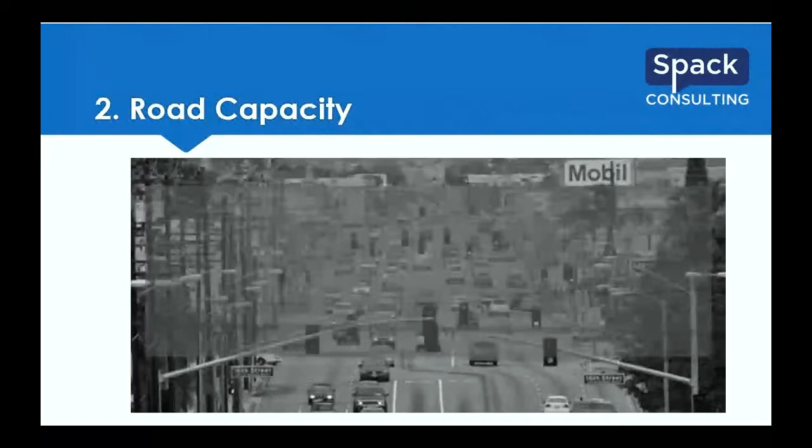All right, moving on. We're going to go to our second topic, road capacity. Yeah, and these are planning level capacity numbers based on the latest Highway Capacity Manual, the 6th edition. And there's a lot of assumptions baked into the tables there. So again, these are rules of thumb. And we pick the daily capacity at kind of the level of service D/E boundary. And there is a range there of vehicles, but we'll just go through the first ones.

And the first bullet point, and this is a controversial one because this is the one number that's not out of the Highway Capacity Manual, is the 2-lane local road. Our next bullet point is going to show a 2-lane road has a capacity of more than 10,000 vehicles per day. But of course, you don't want to tell somebody in their subdivision out in the suburbs that, hey, your road can handle 10,000 cars a day. They will look at you like you're insane.

And early in my career, I read about research coming out of the University of California, Berkeley. I believe the research was done in the 70s, that when a local street had more than 1,000 cars per day, people didn't know as many of their neighbors, and they were able to subjectively measure that quality of life degraded. So this research put the line at 1,000 vehicles per day on just a local 2-lane road for livability purposes, kind of the ADT threshold. So that's what I've used throughout my career.

If any of you have other resources or can help me find that research, because I've never been able to. I've gone back to my University of Minnesota library. I've emailed people at Berkeley. I've done all kinds of things. I think it was Professor Duany, something related to those new urbanist folks that I got on this thread, but I can't find that resource, but I still use it. Luckily, we haven't been challenged too much on it.

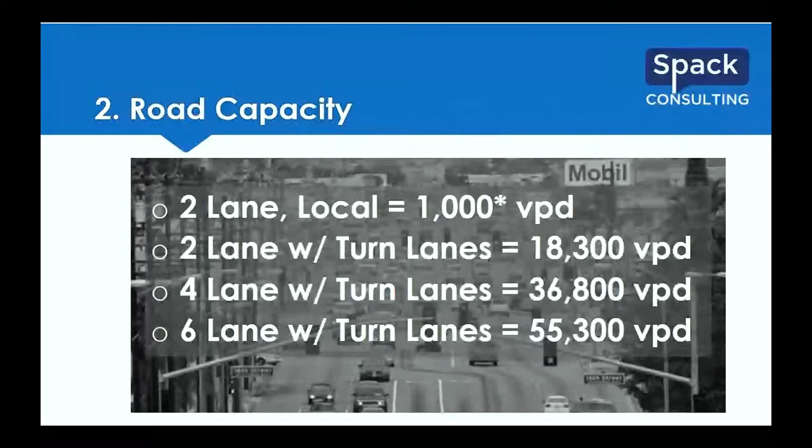And then for the 6-lane, you're up to 55. Again, roughly 18 per 2 lanes. So I like what Brian just said. Just think of each 2 lanes as 18,000 vehicles. So 18,000, 36, 54 just gets you in the ballpark. And based on the split, the commuter split, directional, all kinds of different factors go into those numbers. So that would be a reasonable estimate.

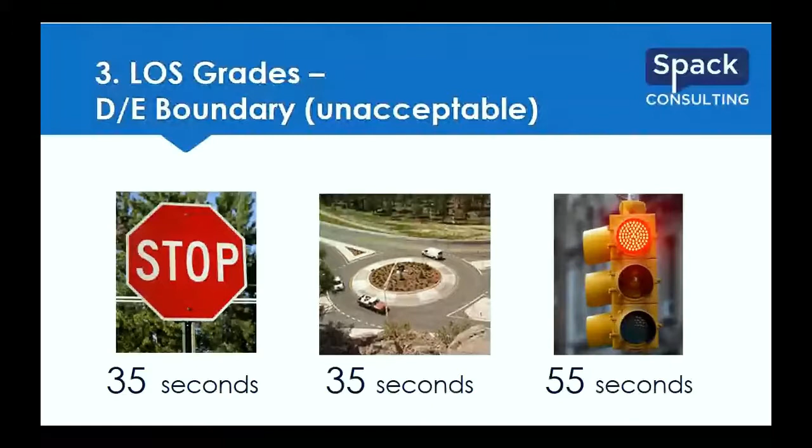But always check the local resources, check in with the local city engineer. Good rule of thumb here, but don't put your foot in your mouth. Yep.

All right, our next one is saturation flow rate. So this is for a specific lane, basically. You have an entry lane, you just have your single lane going into a development or anything. You can use this as the backdrop for that. So 1,900 vehicles per hour per lane. So in most studies, you're not going to have to reference this.

It's not going to come up because you're looking at the intersections or corridors, and it doesn't get down to that grade of detail. More importantly, where this would come up is if you're doing kind of a QA/QC check, particularly for events, and you have an entry that's coming in and you're either reviewing it or your computer is telling you, yeah, you can fit 3,000 vehicles on this single lane into this parking lot or something like that. That's where this becomes more important to think back on and say, okay, we have our theoretical maximum of 1,900 per hour per lane.

If we have one lane and this is telling me 3,000 vehicles per hour, how does that work? It's not possible. Yeah, just because the computer is giving us an answer. This is just one of those things to quality control check yourself. Keep it in the back of your mind. And I usually just round to 2,000 as it's easier to remember. But yeah, just kind of a quality control check. Yep. And this is from the Highway Capacity Manual again.

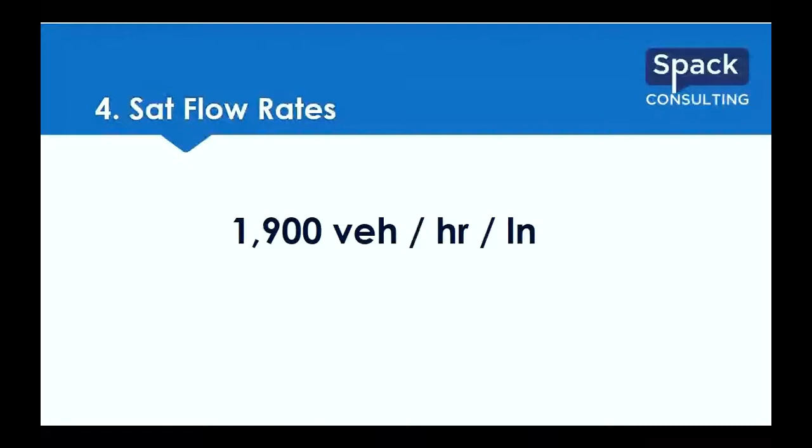So next up is a quick rule of thumb on when you need to transition from having a single left turn lane to having a dual left turn lane. And the rule of thumb here is 300 vehicles per hour is about that break point where a single lane at a signal starts to break down and you need to look at adding a second left turn lane.

Also, we've seen it referenced as the threshold for adding a second right turn lane, but that's a tougher rule of thumb. If you look at this aerial, there's the northbound free rights, and depending on how long of an auxiliary lane is provided, I think you can get more than 300 vehicles per hour if you provide enough of its own lane. Of course, if it's yield controlled right merging in, that's a different scenario than this, which is a different scenario than having a dedicated lane for a quarter of a mile.

Yeah, and similarly, there is a metric that some people use when you go to triple lefts, which is double the dual as you go to 600 vehicles per hour. I haven't seen too much research on it, so use that again with a grain of salt, I'd say. But again, starting with your 300 for duals, double that, 600 for triples. Yeah. Again, just basic guidelines for when you should expand that geometry.

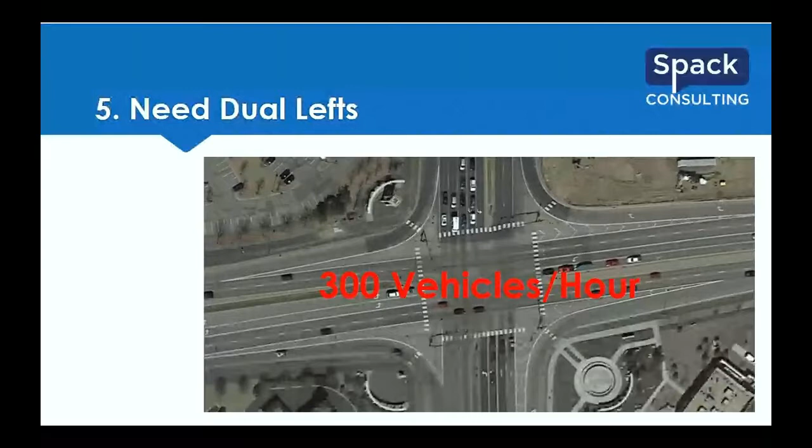Or just looking at your analysis and, again, going back to what do the computers say? If you have 400 left turns and it's saying you can get through there on a single lane and it's giving you a level of service B. Yeah. That might be something to double check. Right. Just to make sure there isn't a glitch in the software you're using. And that's 300 vehicles in the left turn lane specifically, we're not looking at the through volumes here. It's just a general guideline for the number of left turn movements.

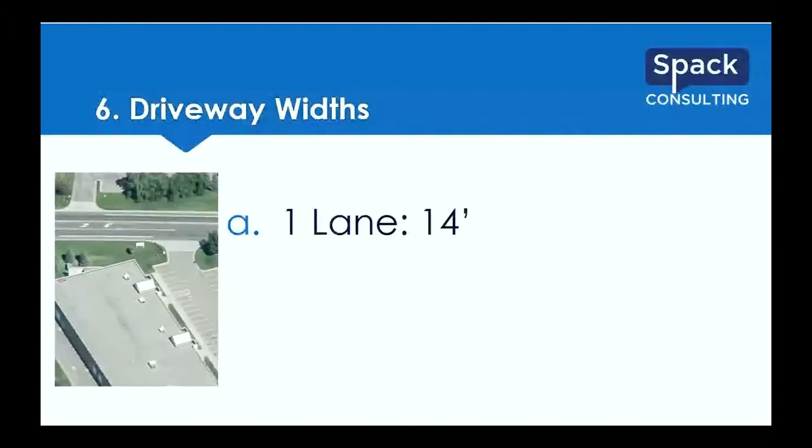So the next topic, the sixth topic, is driveway widths. And this is more getting back to an internal meeting. And again, caveat emptor that local standards, local conditions vary greatly, but these are reasonable numbers we've seen in lots of different guides. And we believe in just a single driveway, provide 14, one lane in or out, 14 feet. You can go up to 24 if it's a one lane in, one lane out.

And then if you have 2 lanes out and 1 lane in, you go to the 40 feet. And of course, industrial areas, you need larger lane widths to accommodate the industrial trucks, the semi trucks, and also larger radii at the driveway.

Yeah, and that's an important thing that's not on here too. Obviously, if you have just a residential 2-lane road development, you come up to an intersection, you can get by with a 30, 40 foot radii on the corner, and most vehicles will be able to make that easily. If you have the longer semi trucks, now you're going to need the 50, 60, 70 foot radius to make sure you can get around the corners and not jump the curb.

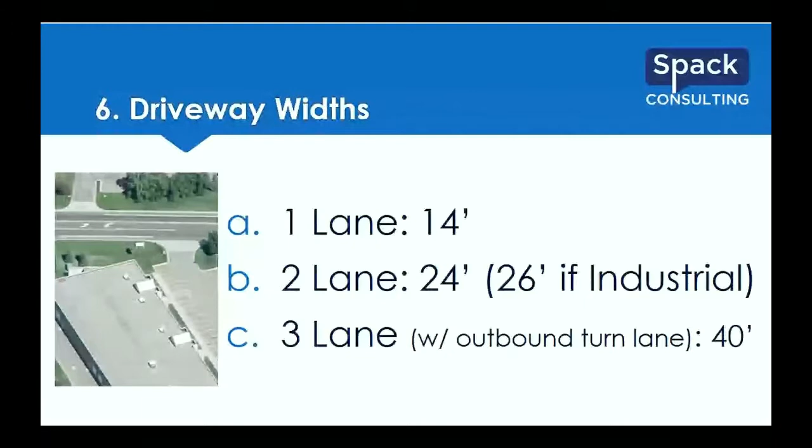Yeah, and then they get so big that you model them as having a right turn lane. Right, and a whole other topic. Yes.

All right, access spacing. So this is really looking at your driveways, or could be intersections too. So your public, your private roads, how do they intersect on the roads? And big differences here between the type of road that you have. So first one is local. We've got a good aerial on the background here where you can see residential development in the back. And if you really look hard, you could probably see some individual driveways there.

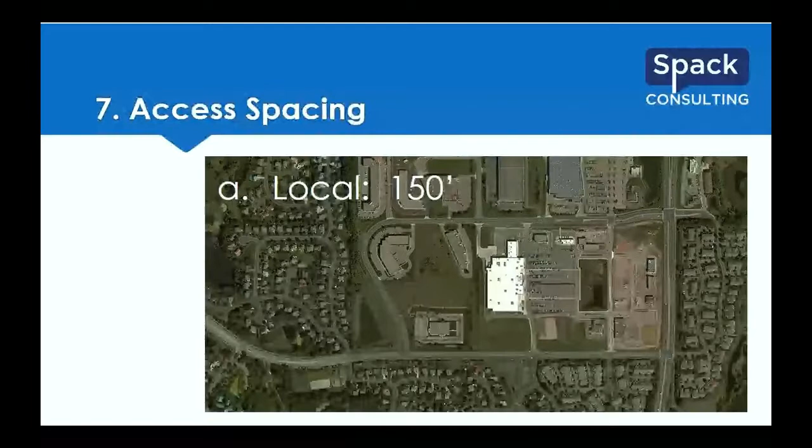But as you just look at this local setup here, the intersections are close. There's individual driveways. That local spacing can be very, very close. Similarly, on this other side over here, multifamily mostly, but they've got the connections pretty close together. And then the east-west local road, you can see for that commercial retail area, not worried about mobility very much. You're much more concerned with access, and you can see the closeness of the driveways. So 150 feet is our guide to make sure that there is some stacking room between intersections so you don't end up with safety weaving problems.

So for Collector Road, which is kind of similar to this east-west, on the bottom of the aerial here, you can see there's a bit more spacing between the driveways. We would say 660 feet for those full access ones. Again, this is getting to more your distance between them for turn lanes, for that sort of geometry to make sure you've got that proper stacking, because you're going to have higher volumes at those intersections.

And you can see where the pointer is, try to make sure those intersections are squared up. So you have 4-legged intersections. If you go up to the local road on the north, you'll see driveways offset, not as big a deal, especially if you have a 2-way left turn lane.

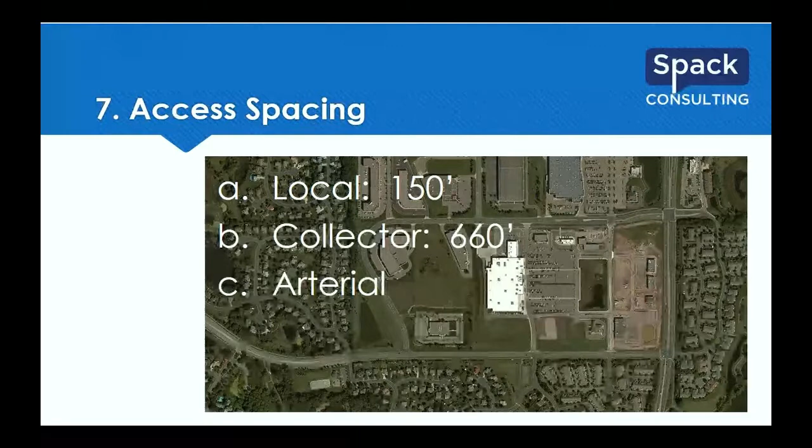And then we get to the arterial. So again, this is in the functional classification where you're most concerned about mobility. Access is less of a concern. 2 that we usually fall back on are your limited access, your right in, right out at 660 feet, and then your full access at 1/4 to 1/2 mile. And this north-south road here would be that arterial, and you can see they've got 2 signalized intersections, no access in between. That's your 1/4 to 1/2 mile there.

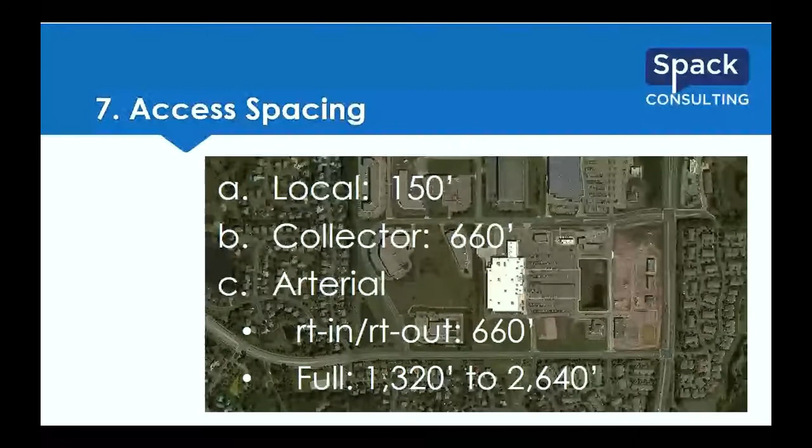So again, good spacing. Yeah, and for any of those international metric type folks on the line, this is very much based on mile spacing. So 2,640 feet, that's 1/2 mile. Then we get down to 1/4 mile. Then we get down to 1/8 mile. That's how we were brought up thinking through our engineering careers, in segments of miles.

All right, getting close to the end here. Next one is for roundabout, and the inscribed circle diameter, outside diameter is what the OD is for there. So through our picture, we're just showing you we're looking from edge to edge of that roundabout. So this encompasses the center island and your circulating lanes. And really what you're looking at are the corners.

If you think of a standard development that normally would come to a corner. And so you need to know that diameter of the circle to say how much are you pushing back onto those corner developments. Yeah, and this is a rule of thumb.

The different rules of thumb: single lane, somewhere between 120 and 160 feet; dual lanes, 160 to 215 foot diameter. And then the mini roundabouts, which I've blogged about and seem to be working successfully. The mini roundabouts, where you're really just dropping an island into a standard intersection, are 50 to 80 feet in diameter. So this is, again, more for the planning and design level meetings.

Yeah, if you're considering a roundabout, you can easily draw that circle over an aerial and just see what the impacts are. Do you have room if you're looking at that sort of range? Are there slopes? Are there retaining walls? Are there trees, utilities? Just drop that circle on an aerial so you can, in 5 minutes, figure out the good, bad, ugly. Yeah. Is it even feasible, or is the water feature too close? Something like that.

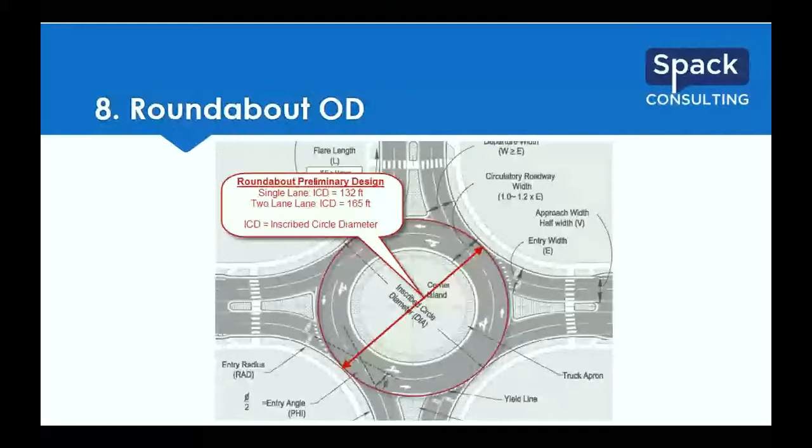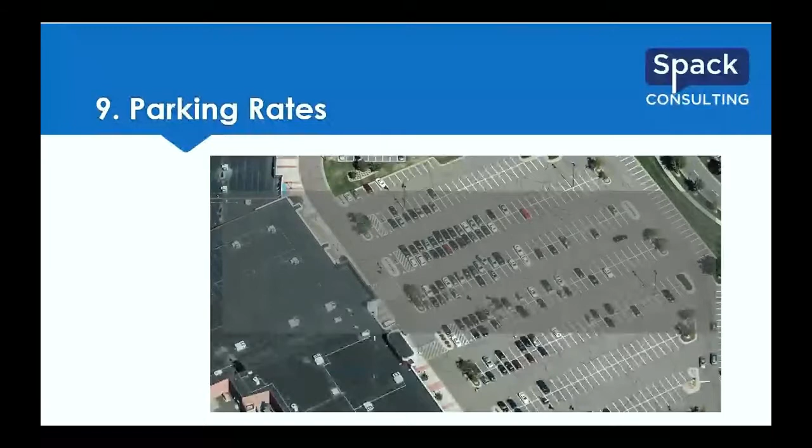All right, and our number 9 topic, for those who are going to hold us to that technicality: parking rates. As you're looking at a development and trying to figure out what you need to provide for that parking lot, what are some general guidelines we look at? The 3 basic ones we have: multifamily, retail, and restaurant. Multifamily, 1 per bedroom. Retail, 4 per 1,000 square feet, and restaurant, 15 per 1,000. These are based on ITE Parking Generation Manual numbers and rules of thumb.

This one is very subjective to location and local patterns. Of course, these are demand numbers and don't necessarily line up with zoning code requirements. So you can have those fun discussions if a city requires 6 per 1,000 square feet at a retail, that kind of stuff. Or apartment buildings: some smaller towns have some crazy ones where they recognize the 1 per bedroom and then also add 1 per unit. So a 2-bedroom apartment needs 3 parking stalls, which seems very excessive from our point of view.

Yep. And a lot of very urban cities don't go by bedroom. They just go 1 per unit. So it's very much dependent on urban, suburban, small town, big city. And the retail can be very subjective as well: if you have a number of different retailers, their peak parking may not line up, so the 4 per 1,000 can be excessive too. Again, it's a guideline. If there's a movie theater whose traffic is Friday and Saturday night versus a grocery store whose traffic is Saturday afternoon, they're more complementary, and overall for the site you can get away with less parking.